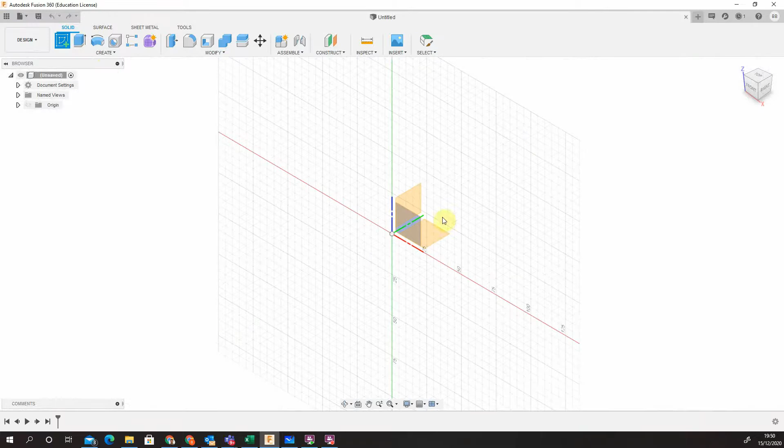Let's go on the top view. We're going to create our sketch. All we're going to do is make a plate, so let's do 50 by 125, get a decent sized plate. Into solid, extrude, and let's just do an 18mm steel plate, like so, it's a typical steel plate.

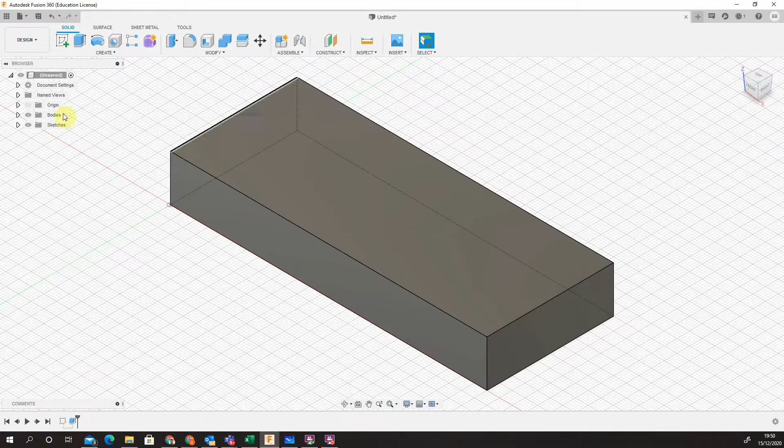So we're going to use the hole tool now, which is the H hotkey, hole, or the hole on the main toolbar as well. We're going to select our face, so I'm just going to orientate around to the top. This is how to do a single placement only. I'm going to put a reference in.

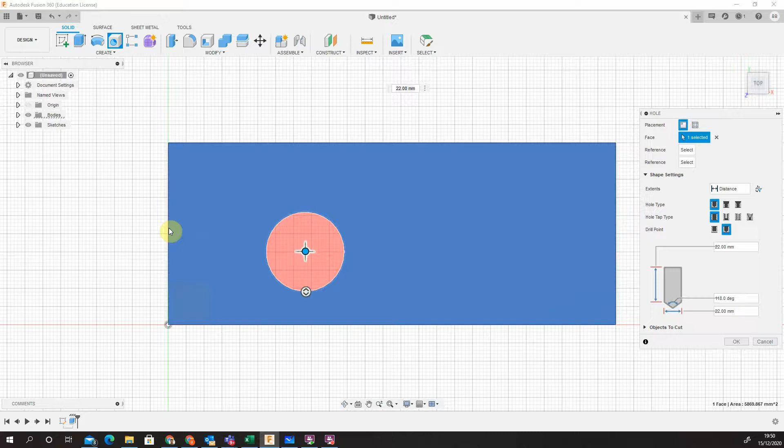I'm going to say that this is going to be 5mm away from that edge to the centre, and my second reference at the top is going to be 10. Now obviously we know that hole is too big, it's going to cut out quite an extensive chunk from my steel bar, so I'm going to want a through all hole, which is why it's not done like this. I want a simple hole.

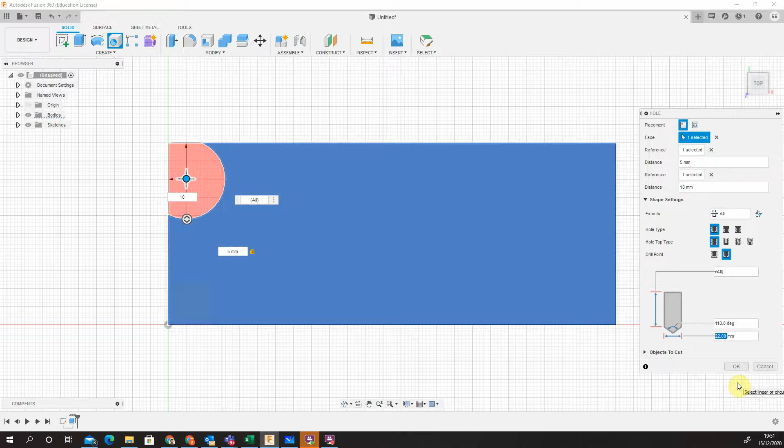I'm going to say actually my hole is going to be 12mm in diameter, 10mm, let's get 8mm in diameter there. That's just a simple through hole, as if a drill did it essentially, as if a drill hole was there.

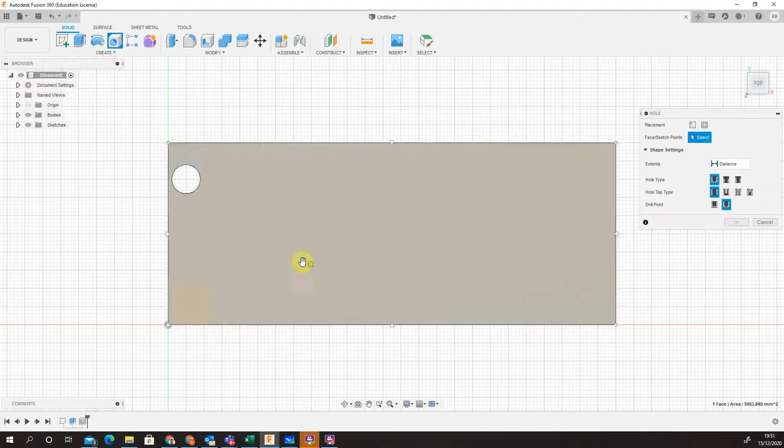So using the same command again, this time we're going to look at a clearance hole. It's a simple and a clearance. So again, selecting my reference, this time I'm going to do 10mm. Second reference I'm going to do is 5mm, 10mm again. So this time I've got 20, just distance it away, so this time I've got a clearance hole.

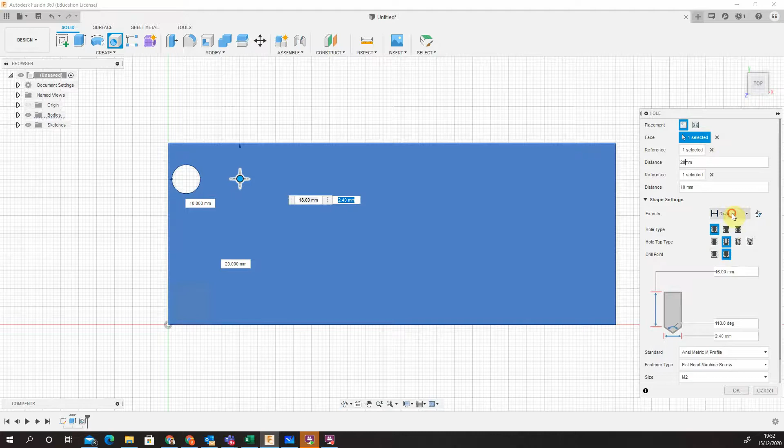Again, it's going to be through all. So now I need to put what my clearance is. I'm going to say this is going to be a hex bolt, it's going to be an M10, normal fitment. Okay, so then now I've got a clearance hole for an M10 in there as well.

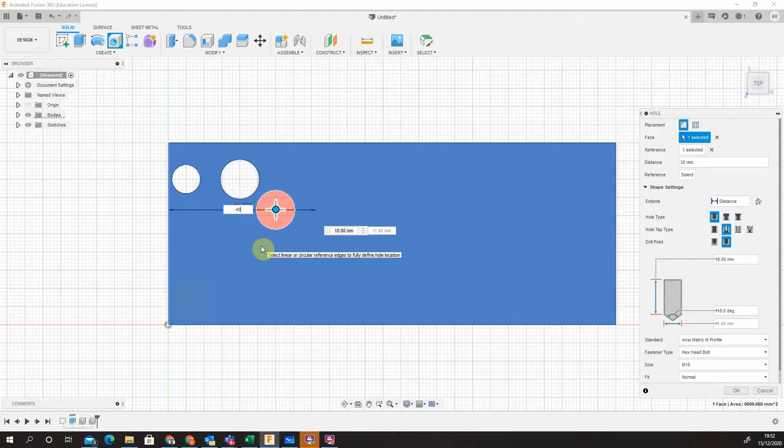Going from the top again, using the hole function again, this time I'm going to choose my reference as 30. Let's do 40 because it's quite a big hole, and 10. Let's do 35, get that a bit further down.

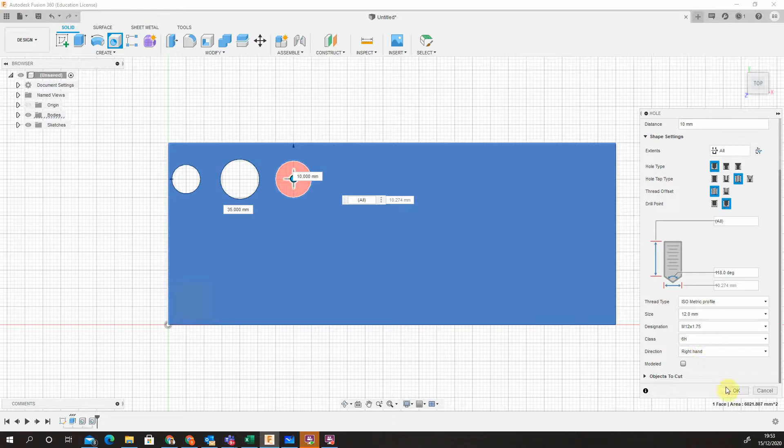So this time I'm going to use a tapped hole. Thread offset, so it's a through all rather than an offset thread. Again, I'm going through all again, I don't want to tap to a distance. This time I'm going to choose a 12mm hole. M12 comes 1.75 coarse thread, class 6H, and I want a right-handed thread. Now I have a standard drill hole, a clearance hole, a tapped hole.

So when I come out, I can see that my thread's got a cosmetic or visual thread there as well.

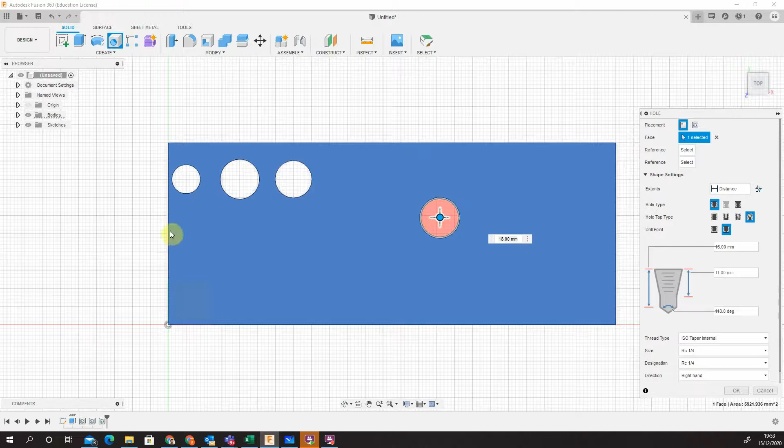Again, so back on the hole again, let's choose this one again. This time we're going to choose a taper tap. So again, just going to do my references, reference them from the side. This will be 55, that's 45, 50 maybe. Second reference 10.

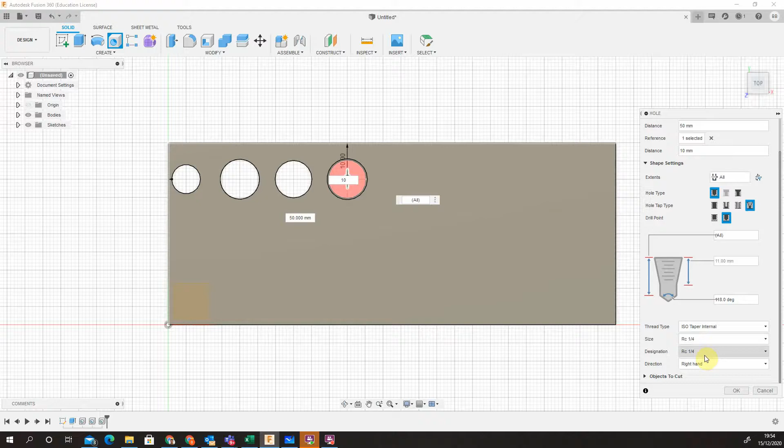Now I've got a nice little taper tap. So as you can see, it's straight through it, and then as you get down to the bottom, it tapers off for the hex bolt with a shoulder.

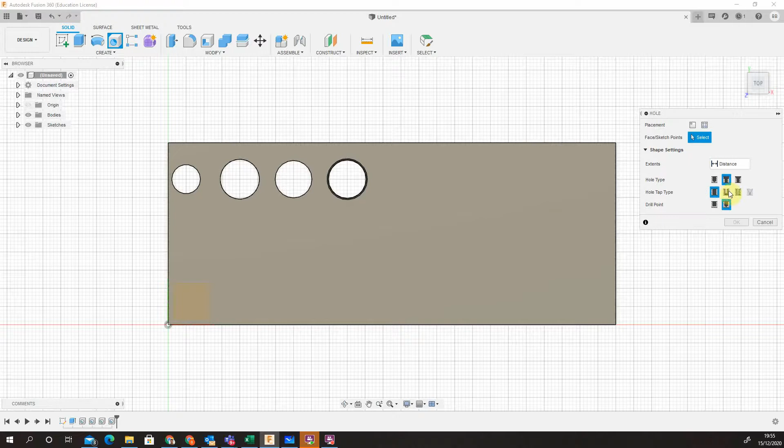Okay, last one on the hole type, you've now got a counter bore. So obviously we have two types of counter bore.

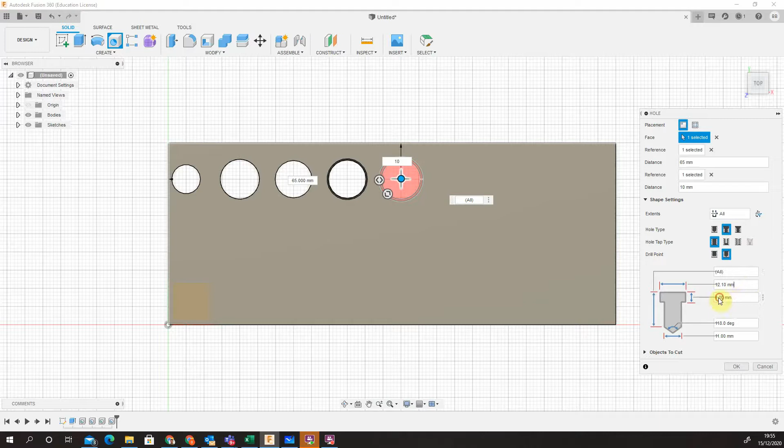So we can do a counter bore, you can see it's 16, and then in depth let's do all. We've got 12.1, 1 mil, that's by 11, so we've got a nice little counter bore.

So it's obviously counter bore, so again you might think that counter bore is pretty tiny. You've got a depth of 1 mil, let's put that to 5. Let's keep that counter bore depth, and I'm going to put an internal depth of 10.

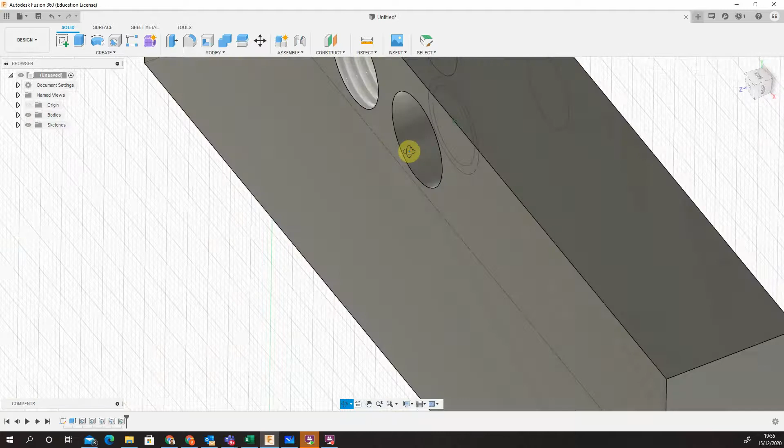There we go, nice better size. So my counter bore socket there as well.

Last one then is we can choose on the top, we can then obviously do a countersink, keeping it in line.

Let's put that at 80. And that one then 10 again. So this time I countersink.

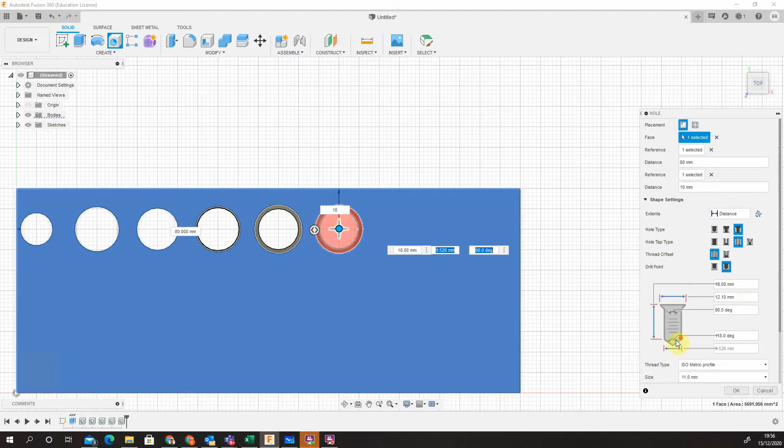I could put a tap countersink this time, so I could say, well, I want an M10, 1.5, that'll put my countersink approaches in for me as well. I could do a clearance on my countersink. It really depends on what kind of fit that you want.

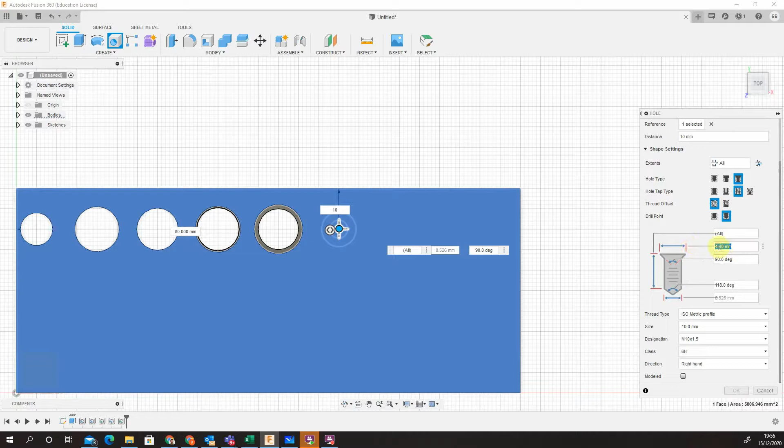Through it all again. Let's do 12. There we go. So it's got a 12 mil countersink on a nice tapped hole.

So if our tap socket will come all the way down. So that's everything you can do with the hole command.

So what else we could do is also have to reference this every single time. If we make a new sketch on the surface and we use the point tool, which is located in here, I could actually do a point. Now I could say one that's 10 mil from the edge, for instance.

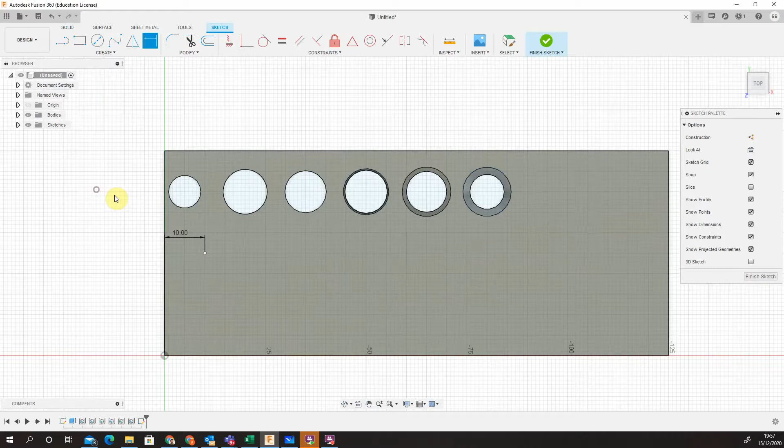Okay, then I could come in and make a rectangle pattern or a straight line pattern. So that's my object, direction along the base. And I could say I want it to travel across 125. Or actually, no, let's just say 100 because I want to go all the way to the edge.

I could say I want 5 holes. 1, 2, 5. That'll do nicely. That gives me 5 points.

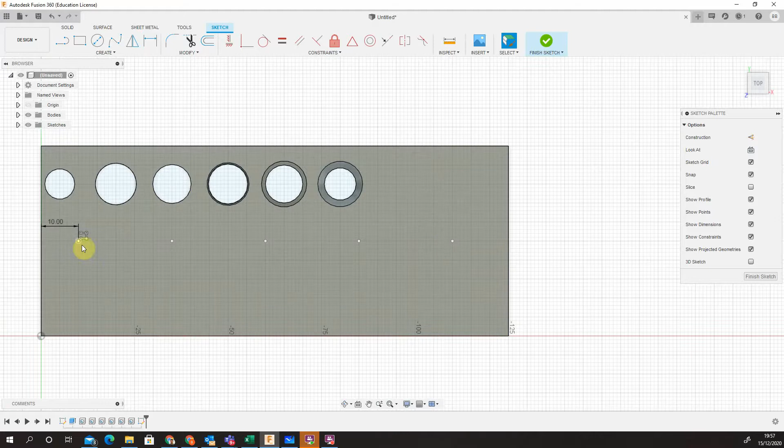Finish my sketch. Now when I come in to my hole, I can now choose multiple holes from sketch. Select my holes.

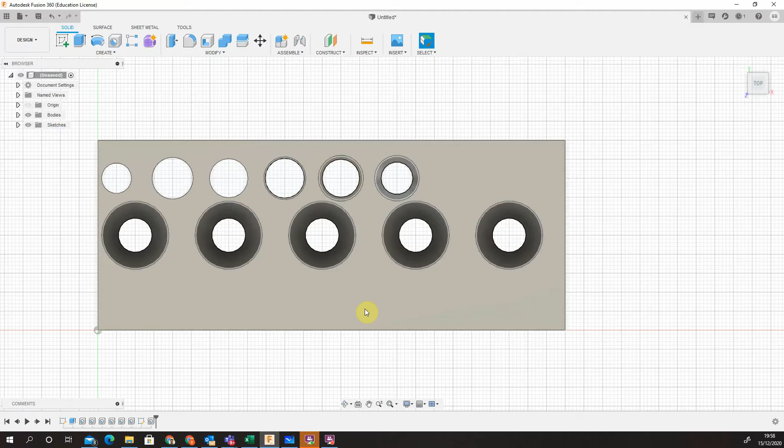5. I can say now I want a clearance, a clearance for an M8. My profile, and I get 5 holes exactly the same.

It's quite a strange countersink there, but let's look at those features again.

It's a clearance, that's because it wasn't through all. So for distance, let's go through all.

And again, that seems very small for an M8. So again, you can just keep going and editing the features. There's M2, that's one.

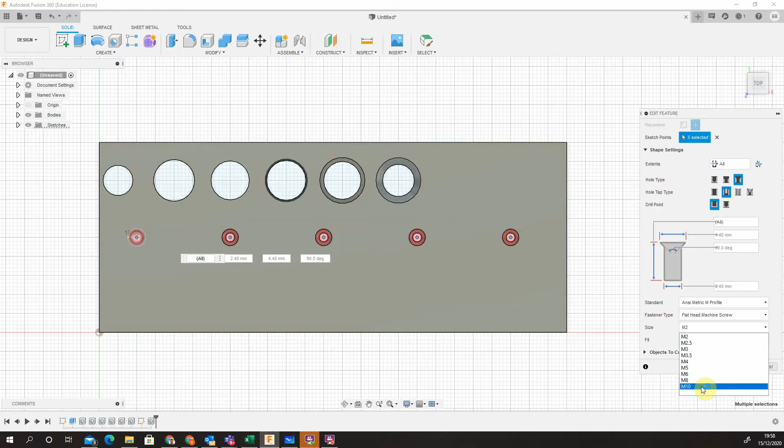Let's do an M8. Again, that's those features there.

So the last one is to do threads. So what you could do is you could obviously make another sketch. I could put a hole in. I can make a 12 mil hole.

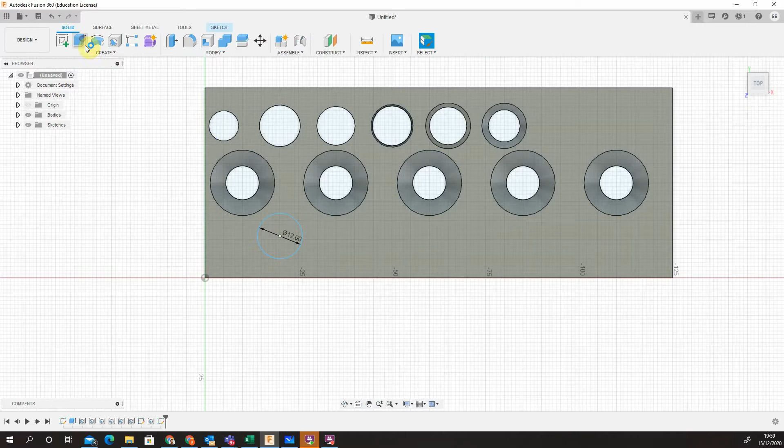Okay, I can obviously come to a solid. I could push pull or extrude this out. So cut all, okay, like so.

Now I can come to my thread and I can do a nice internal thread. So I can pick up my thread, and pick up it's 12 mil hole.

12 x 1.75, or I could choose 1.5 or 1.25. This time I'm going to do a fine thread, 1.25, and okay that. I'll put my thread in.

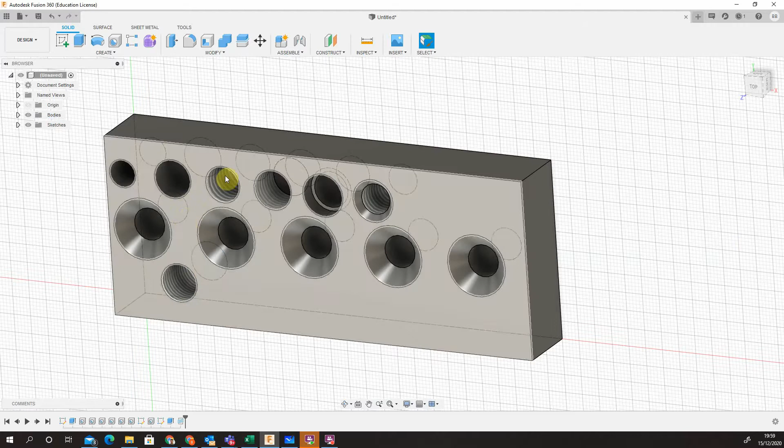A bit more of a long-winded way than putting a hole in, to be honest, but it does also work that way as well. Now obviously what's very good about this function is if I was going to do the reverse.

So if I come back, new sketch, I could put a hole, let's do a 12 hole.

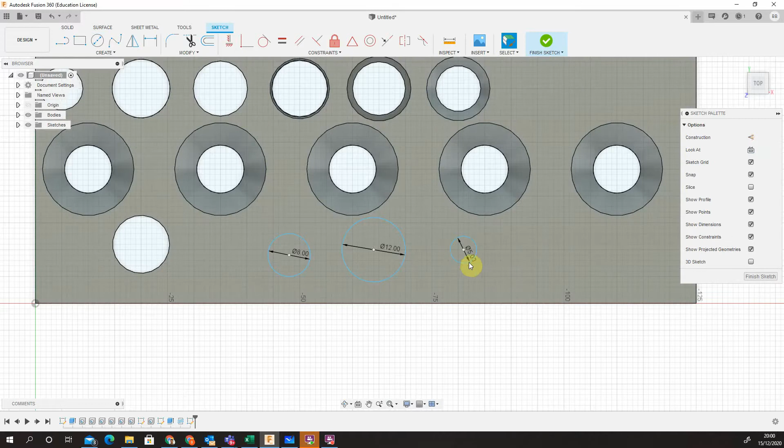Circle, let's do a 5 hole. This time I'll use push pull this time to show you a different way to do it, but let's do 15 high, like so. It's now got like 3 kind of.

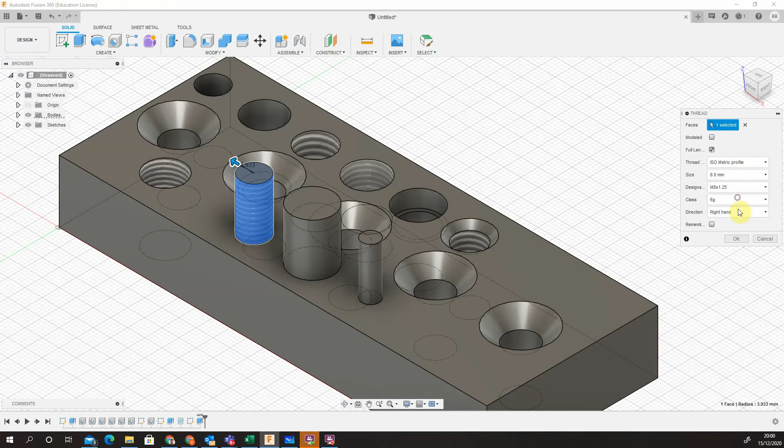So obviously putting external threads on is really good because it picks up their geometry, like so.

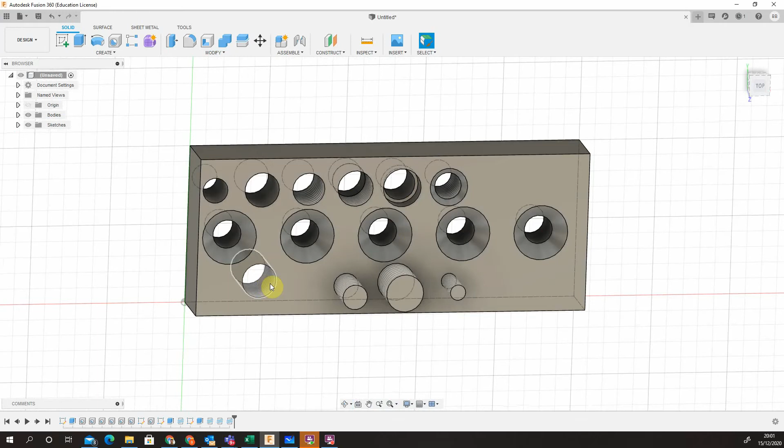So there's every kind of type that you can do, starting from drill hole, into a clearance, into a thread, into threaded taper, counterbore, countersink, multi-holes using a sketch, use a hole cut out with an internal thread, and obviously holes extruded with an external thread as well. So that's how to use all the different holes and thread functions within the system.